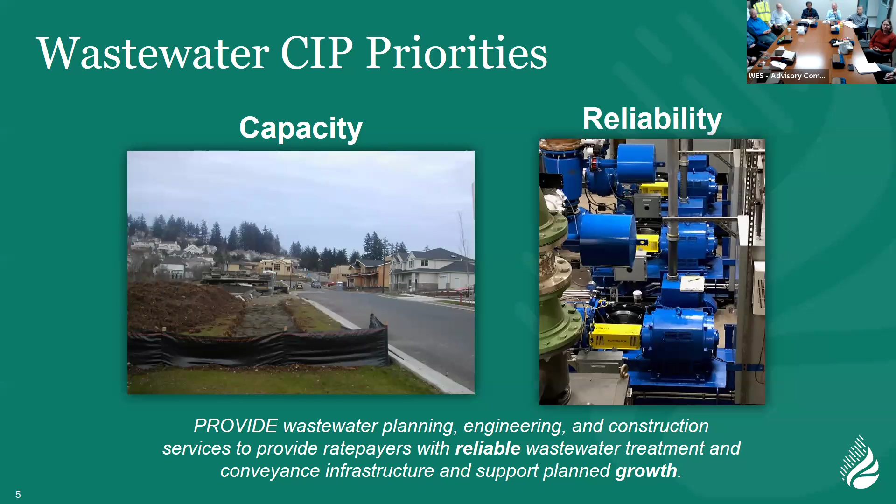So not a huge change from last year to this year in terms of what we're spending on reliability to capacity versus regulatory. You can see as much of our plan is about making sure that we continue to maintain and have our existing facility operate as it is about capacity.

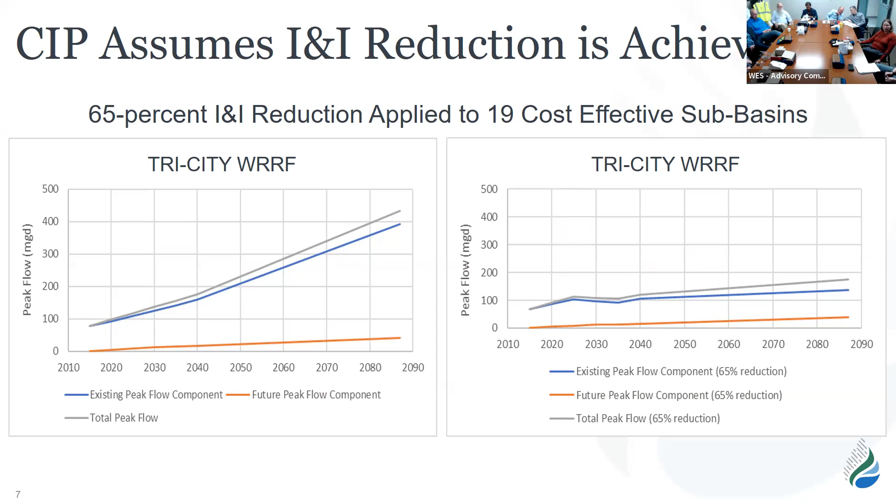So the summary of the major changes, just to kind of highlight the bigger things that are changed here.

We went through and updated all of our project cost estimates to the Engineering News Record construction cost index of July 2024. That's for projects where we haven't gotten any design details or a new estimate from an engineer as we work through progression of design. Any of those projects just got the Engineering News Record index applied to them. Where we got new estimates, those new estimates were included in the plan.

Based on some of the changes in costs, we adjusted the timing for the Upper and Lower Clackamas Interceptor, and it's also based on some of the flow monitoring we're seeing. It's not coming up in those basins as quick as we thought, so we're adjusting the timing of those.

We had planned to deliver the Willamette Pump Station and Force Main, building it concurrently, and we've separated them out to build one after the other now instead of building them all at the same time.

The Tri-City Influent Pump Station project costs went up significantly. That was really driven by electrical needs that were found. When we went in and started sizing pumps, we found that electrical wasn't captured very well or very clearly in the facility plan. They used a kind of percentage-based approach, where this is almost as much an electrical project as it is a pump project, just because the electrical drivers are significant in there.

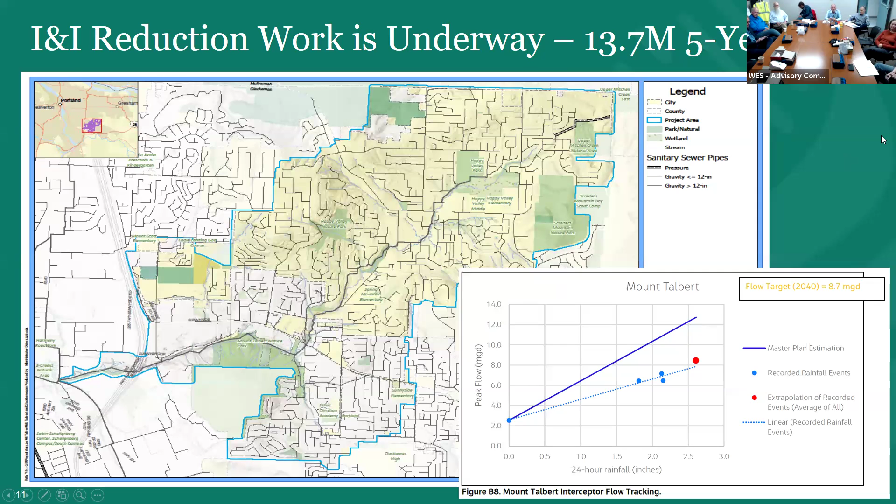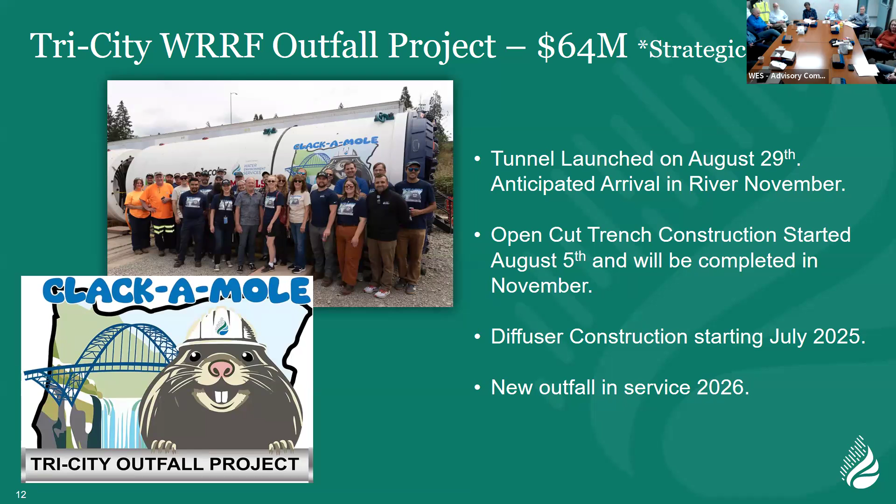With the increased flows, do you anticipate any impact on your effluent limits in the permit, the water quality based ones? It'll probably change your dilutions. I think it'll change our mass load.

When we looked at our outfall and diffuser design, it was designed through 2080 flows, so the outfall will be able to handle the dispersion for current water quality standards.

Did you want to add something, Ron? Just to get back to William's question, and a question for Jeff: the capacity we're designing to for the wet weather expansion assumes a reduction in I&I, right? Yes. So as soon as we build that project to a smaller capacity than we would have if we weren't assuming a reduction in I&I, we save money, because otherwise this wet weather expansion project would be much larger.

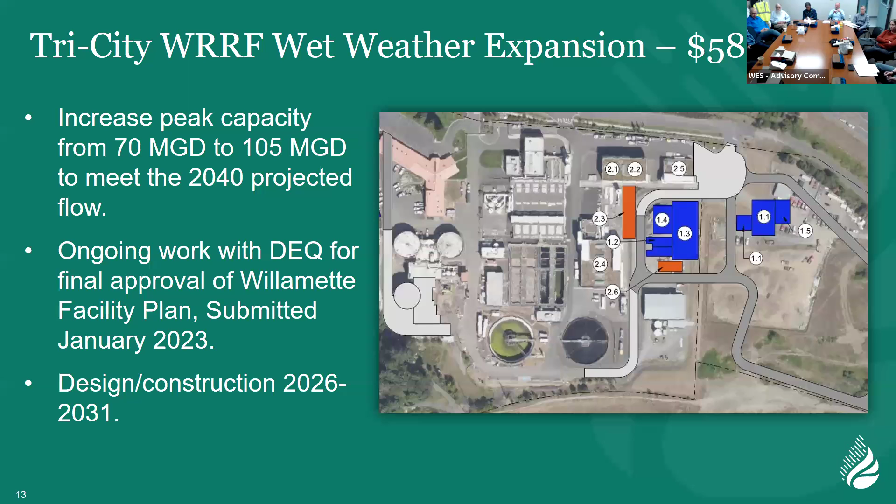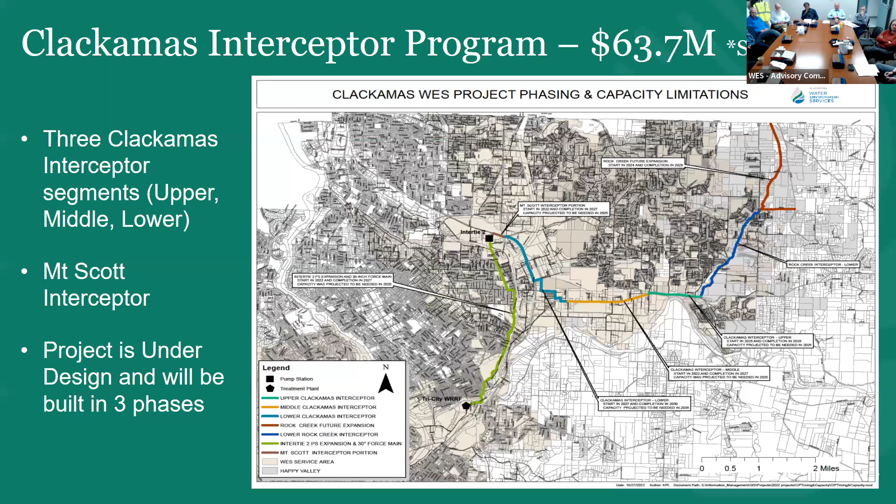I've talked about this one, so I won't go into details unless there are questions - stop me - but I'll just kind of talk about the highlights and why they're there. Next slide.

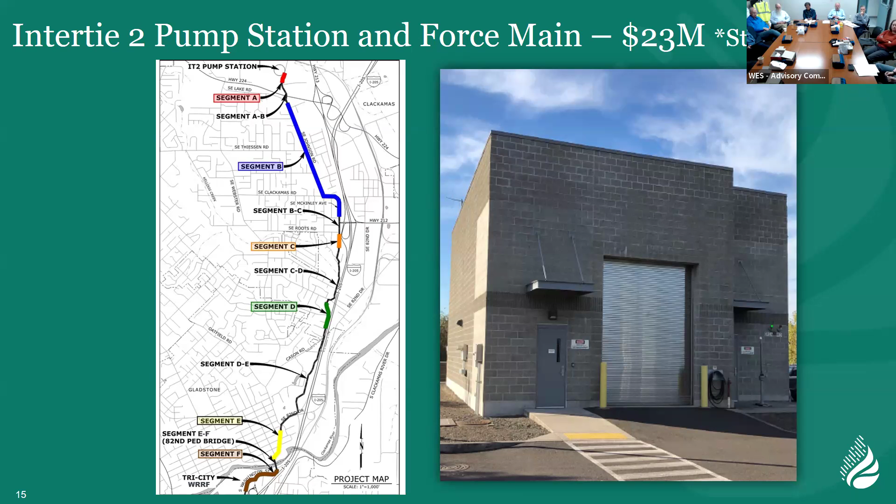The Willamette Interceptor program is kind of 3 projects: the project ODOT's building, our force main, and our pump station. As I mentioned before, we broke this up. Originally we were going to build the pump station and force main at the same time, but looking at the financial side, we're going to put one - it's unclear which - since they both cost about the same amount. We'll be working through which one goes first for construction as we continue design, working with operations to determine which is needed first.

We have capacity in the existing force main to meet today's needs, but that pump station has some pumps that clog and cause issues. So it might be that we build the pump station first, but use the old force main to start with, and then come back after that and build the new force main. I think that's probably where we'll end up, but we'll work together to figure out what makes most sense.

That's a great example of the kind of dance we do to keep that rate profile looking like this instead of doing that. Aaron and the finance team, Jeff and the engineering team work really hard to sequence things so we can maintain that. What you see in the plan is four times back and forth shifting projects around and looking at capacities and what's going to drop that. So it's never the first cut, for sure.

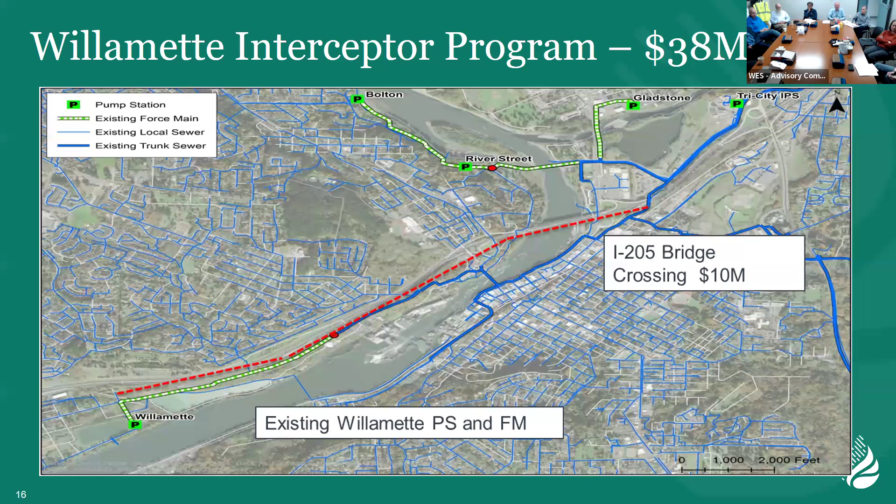And then the Bolton force main - this is the smart pig inspection we did. This is where we've had three breaks now since I've been here in this force main. It goes through Maddox Park. We launched the smart pig this summer to collect information and understand, given we've had these breaks, what is the condition of this force main. We found some things they recommend we go do a physical evaluation on, so we'll be out there probably soon digging holes in a few locations to see what's going on in the pipe. This smart pig is a really fascinating thing.

It sends out a signal and looks at the interior surface for anomalies. There were a number of places where they said, hey, we find an anomaly here and there's no fitting that we expected to be here, so you might want to go take a look at that location. They can tell exactly where on the pipe and at what location - the report from that is really amazing. That was one of the things that kept me up at night, not knowing the condition of that thing underneath the river. It came back with about six areas we will now go investigate, which gives me great comfort knowing we're being proactive now and not waiting for things to break.

Because inevitably they break at the wrong time.

They always do. The PIG doesn't stand for anything, does it? No - or is it just that the engineers say it looks like a pig? Actually, it was the noise it made as it came through the pipe - it sounded like a pig. I see, and so they got termed pig.

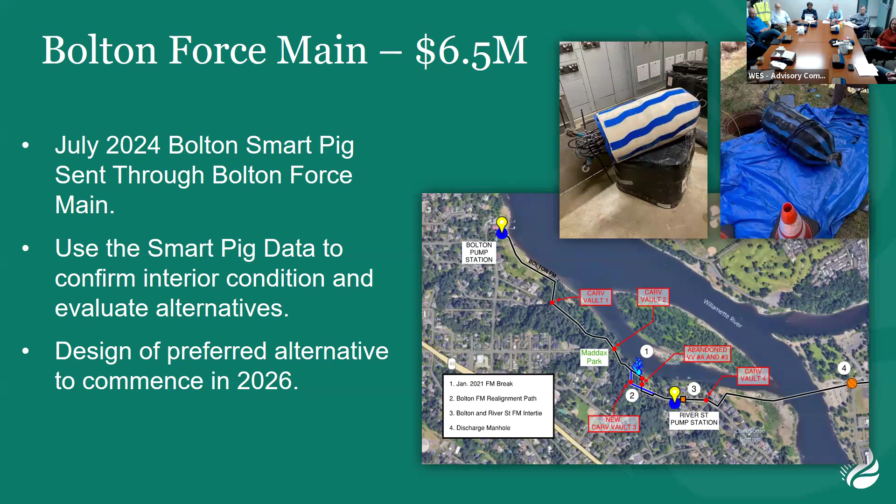When I first started here eight years ago, it seemed like every couple of weeks we had some emergency fire drill, having to swing through and replace a pump that failed or something like that. Now we've got it to where we're really doing our regular PMs, and we can anticipate when those needs are, and program them into these ongoing costs where it's just a pump swap out, not a pump swap out and a whole bunch of other stuff that failed because the pump failed and caused a bunch of damage. So really, really happy with the condition of our asset program right now.

And then next slide.

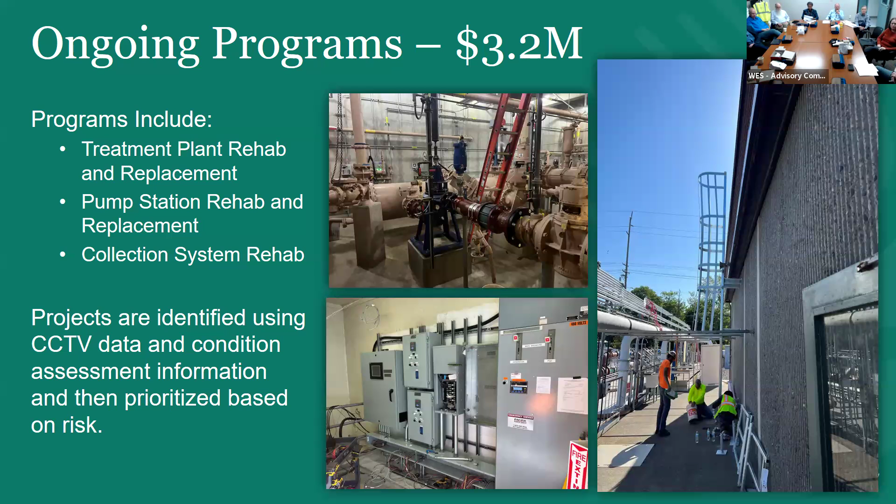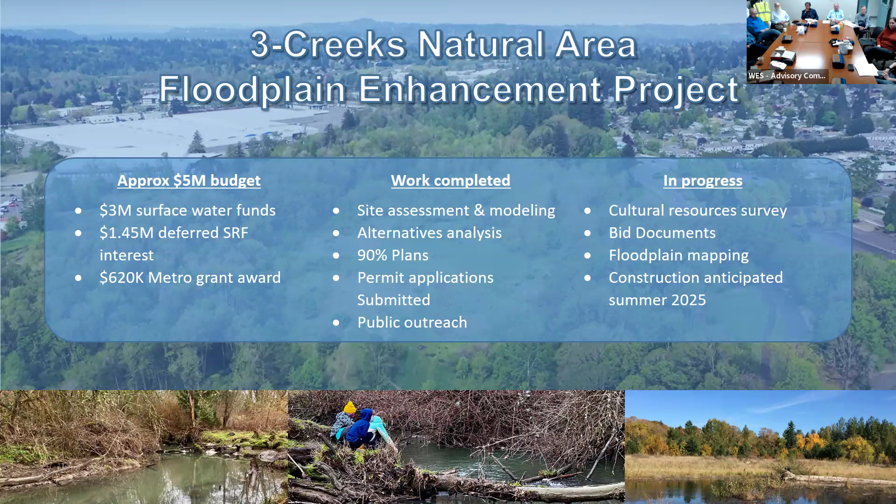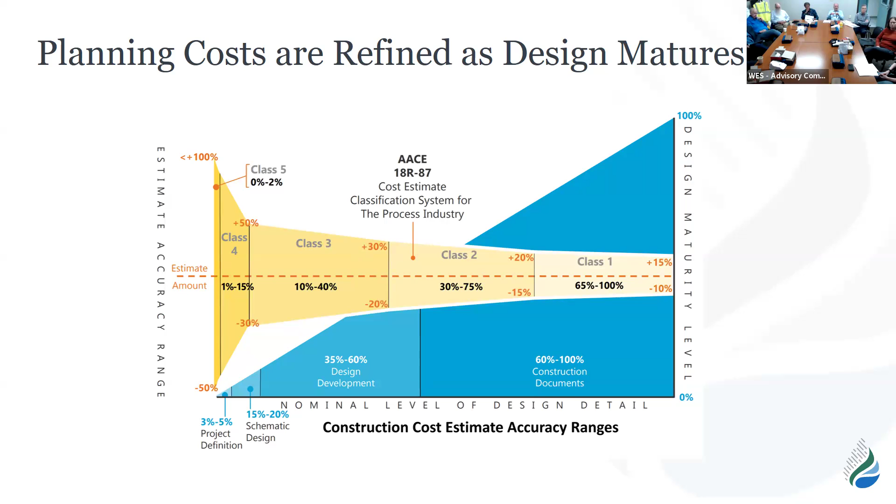And then next slide. And I'll turn it over to Aaron.

All right, so financial and capital planning are integrated processes, and once Jeff's team gives his project estimates over to us, we input that into our financial model to determine the financing sources for the projects and the resulting rates. So these first two slides will be a quick refresher for most of you, but we wanted to provide this information as context for some of our newer advisory committee members.

This is the long-term financial plan that we worked to develop with the advisory committee and finalized in March of 2022. These 5 objectives have been used to guide our annual budgets since that time, as well as the financial aspects of our capital planning. The first 3 are the most relevant to capital planning. Providing all necessary services to protect public health and water quality speaks to first financing all operating and maintenance costs, but also covering the reliability and regulatory aspects of the capital plan to ensure that services are reliably delivered and we're meeting all current requirements.

Number 2 is directly related to that capacity piece on that chart that Jeff showed earlier. That speaks to financing all capital improvement projects that support growth as they're needed. And number three, cost-effective service delivery, speaks to controlling operating costs, ensuring that we maintain access to low-cost capital through sound financial management, and setting our rates based on cost of service.